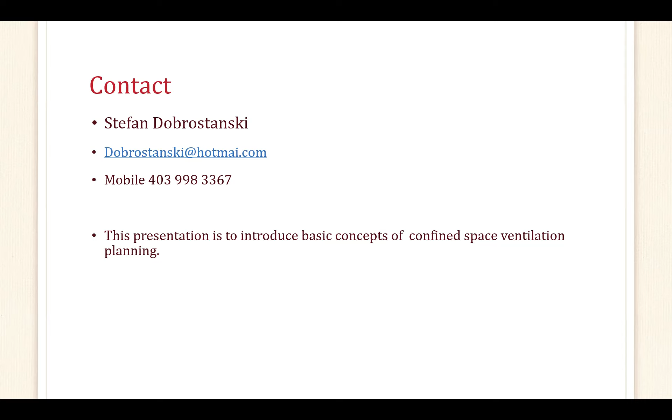I'm going to make a few basic assumptions during this presentation: that we all understand the definitions of confined space hazard ratings, confined space program elements, the roles of the parties involved in confined space planning and execution—the employer, the supervisor, instructor, and so on—isolation requirements, work permits and work records management, along with that hazard is a condition that may cause loss, risk is the probability that loss will occur, and that exposure control plan requirements are also understood.

These are fundamental to defining what type of ventilation planning needs to take place. If folks don't have these fundamental understandings, give me a call afterwards and I will be happy to go through each one of those. The terms are very specific and are outlined within regulatory requirements in both BC and Alberta, and within industrial hygiene practices as a rule.

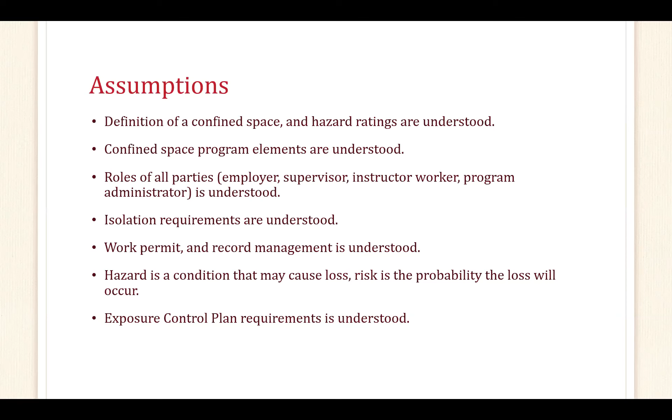So let's talk about some of the statistics and why this is so important. These are all mortalities. 15% of confined space training—15% of people who had mortalities had training. 31% of the events had written confined space procedures. None of them had a rescue plan. None of them used the written procedures. None of the events had spaces that were tested prior to entry. None of them were ventilated. And 60% of confined space fatalities are would-be rescuers.

So there's a couple of reasons why I pulled these stats out. Just in case anybody's interested, these stats came out of a study that was done out of Quebec that spanned 25 years.

At the end of the presentation, I've got a link to that if anybody wants to go read it. If you're a safety geek with a keen interest in this stuff, I strongly recommend that white paper, because it was instrumental in changing fundamentally how a lot of the regulators approach confined space education and requirements. It came out about 3 or 4 years ago.

So when we look at these, there's a couple of things that stand out right away. Understanding that ventilation planning is part of the written procedures. So if you don't have written procedures, you've got a big problem. If you have them and you don't use them, you have a larger problem.

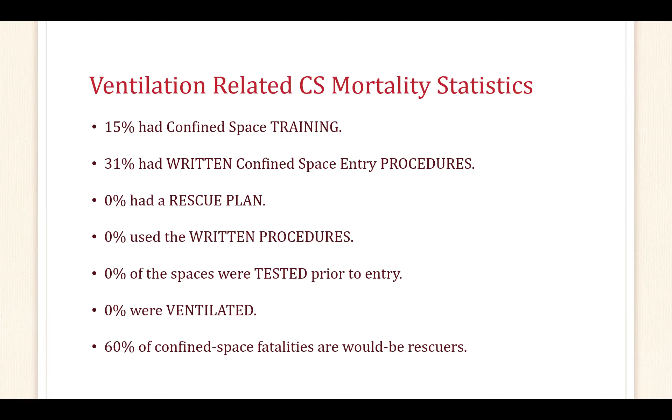So, hazards, hazard risks, and triggers. These are suggestions. These are my best recommendations. They are not the only way to do this.

Hazard examples - a list of fixed hazards should be in your confined space inventory. So your confined space inventory is not just a list of, I have vessel 1, 2, 3 in building A, vessel 2, 3, 4 in building B, and so forth, all listed as confined spaces or assessed as not confined spaces. It can also include all the fixed components.

This vessel has a weir inside it. It is a nitrogen entry. It needs scaffolding to reach the platform. WorkSafe BC has a very good template that I urge everybody to take a look at and either adopt or modify for their particular needs.

If you put your fixed hazards in your inventory, you never have to go back and visit them unless you do a physical change to the space. That's going to reduce the amount of effort it takes to do your assessments, and it's also going to centralize your primary information that you need for doing your ventilation planning. We'll come back to what that is in a little bit.

So then you've got your dynamic hazards. Those are going to be on your hazard assessment. Your dynamic hazards are things that change once your confined space is being prepared for entry, based on the work happening within that space. As an example, you've opened the space, washed it out, it's been proven to have a good atmosphere, and now you're going to go in and apply an isocyanate-based coating to the interior. You've now taken a safe space and made a very hazardous space based on the potential exposure to a cyanide-based gas.

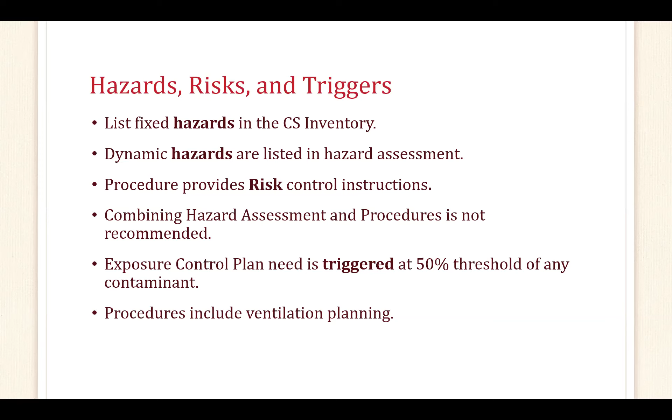So in your ventilation plan, when we get to that, it's quite simple what it needs. You have to have an evaluation of what to control. This is going to include your suspected contaminants, your measurement methods, your thermal differences — and that's one a lot of people forget, because even though something might be lighter or heavier than air, if you've got convection currents going on within that space caused by thermal considerations, you are going to have to take that into account when you're doing your ventilation planning and your measurement.

After you've got your evaluation, you have your flow rate — how much control to apply. We're talking specifically how much air we're moving through the space or into the space. And then finally is the method: how are we going to control that? Are we pushing air? Are we pulling air? Are we using natural ventilation or mechanical ventilation?

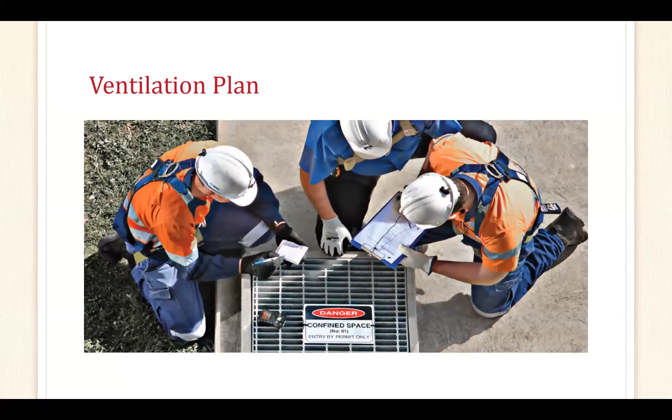Where are those mechanical air movers connected or located? This is fundamentally what a ventilation plan has, and that's really all it is that we need to be concerned with.

So under evaluation, space configurations are going to make all the difference. That's going to include everything from an excavation, and yes, a ditch or excavation can absolutely be a confined space. Look up the definitions in your regulatory area. Long story short, if you have an excavation that is more than, I think it's 4 feet deep in BC, and your slope on your walls is greater than 45 degrees, you start asking questions right away, because if you're going to introduce any form of a toxin, you are more than likely going to be in a position where that excavation is now being considered a confined space. There's a bunch of other criteria, but there's some mathematics we're going to talk about later about why the space configuration specifically for excavation is a bit tricky.

Obviously, the next big bucket is going to be: is it an enclosure? Do you have trays, or baffling, multiple flow restrictions? Do you have ventilation louvers that might be auto-actuated, or need to be positioned open or closed so you can direct your air movement? You have single or multiple flanges or ports to push or pull ventilation through. You have multiple connected sections. So out in multiple industries, we have a vessel or a space that's connected through piping or an adjoining structure, and then another space. We can't always get blinding into those, or we can't get isolation into those. So when we run into those space configurations that are a bit unusual, we have to do the calculations for that entire space and consider how we're going to do the ventilation depending on the work that's going on in the entire area.

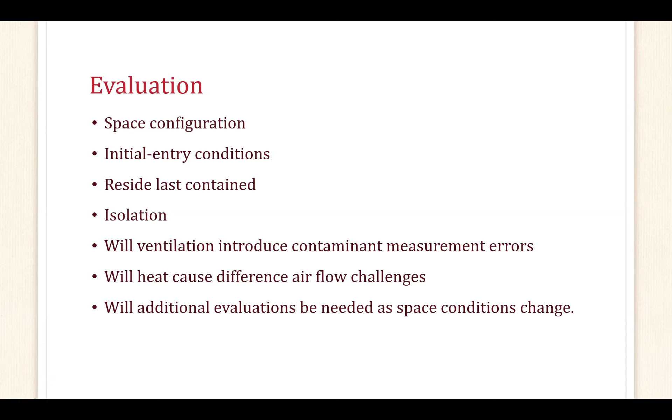But the moment we start introducing new hazards, whether that's a coating or off-gassing of materials, everything has to change. You have to be prepared for that in your procedures.

So in ventilation methods, there's fundamentally two basic considerations: natural ventilation and mechanical ventilation. Natural ventilation is the most desirable and the least used, primarily because people don't take the measurements and understand what needs to be accomplished. We need 50 CFM per worker inside a confined space where we're not introducing a hazard. We have a good atmosphere that exists, and we're not welding, specifically welding.

That's not a lot of air, and we can generally get that through natural ventilation in many spaces. It has to be measured. You can't take a guess. There's lots of good devices to do that.

Mechanical ventilation, number one sin I've seen in the oil and gas industry specifically is people put a gigantic air mover on thinking more air is better, and they blast the air into a space, and they only need, I'll pick a number, they need 2,600 CFM, and they're shoving 10,000 CFM through a space, and they're causing harm and discomfort to the person they're working with.

I've literally had my hard hat pulled off when I was entering an area to do an evaluation through a 36-inch pipe, and it literally sucked my hard hat off my head and pulled it down through 50 feet of pipe to the other end and pushed it up against the ventilation device. That's a little bit much, right? So measurement is everything.

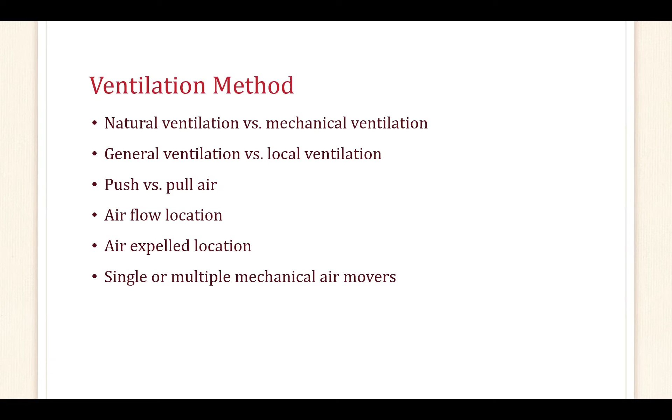Ventilation methods - this is the last part of this big topic. What are the volumes we're looking at? It's going to depend on the concentration of the contaminant present. Are we looking at pushing or pulling? We talked about that over and over. We talked about the requirement for 50 CFM, but when we start looking at something like a welder, you're going to need 2,500 CFM per welder, assuming the space is 10,000 cubic feet. There's all kinds of requirements to look at in great detail around fumes, smoke, and dust.

Part of the ventilation method we talked about was local ventilation. Here's a chart I pulled out of an AIH booklet that gives some very basic figures for welding. With local ventilation, a 4 to 6 inch inlet is only going to move 150 CFM through a 3-inch duct, and we can go from there. How much area do we have to move? If we're doing a 1/4-inch rod, which is massive, 600 CFM is probably going to be enough, but 150 will not - it won't overcome the requirements.

So just think about the ventilation - why are we doing the things we're doing? How are we going to get them done? Can it actually be accomplished, or are we just dreaming things up? Is there a better way? The number one way I figured out to do a lot of ventilation planning in my career is I sit down with the tradesman and ask them how it's been done in the past.

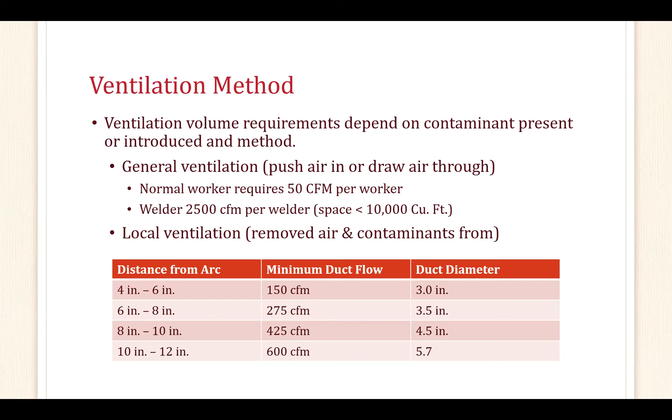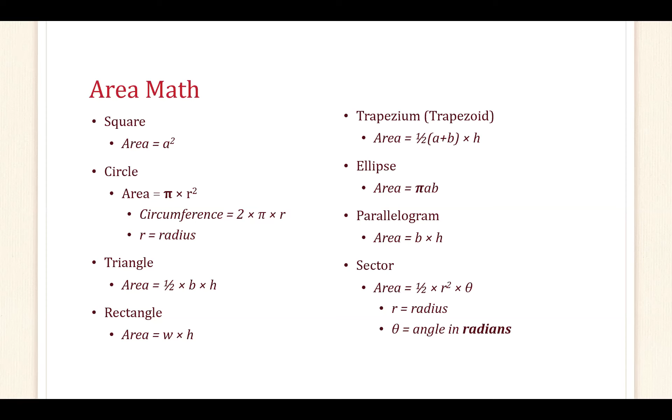And then I put the math to it. So a couple of really important things: there's no way to make math fun, I'm just going to throw it out there right now. We need to understand area math and we need to understand volume math. I'm not going to go into it in detail, but I've left these in the presentation so that people have them. I'll show you in a moment why they're important.

So as we start going through airflow, the last thing we need is to measure it. Putting your thumb in the air or holding the ribbon up is good to confirm that airflow exists, but it's not going to give you a scientific measurement of are we actually moving the right amount of air, too much, too little, the wrong direction, and so forth.

A couple of things when we're doing these measurements: make sure our scale is correct, and whether we're consistently using either standard or metric. Really, really important, because feet per minute is what we need to end up with. Cubic feet per minute is a standard explanation for velocity and volume. If you're reading in inches per second, or miles per hour, you're going to have to convert those back and forth. Really important to get this. So check your meters always, understand what's going on, and get that sorted out right away.

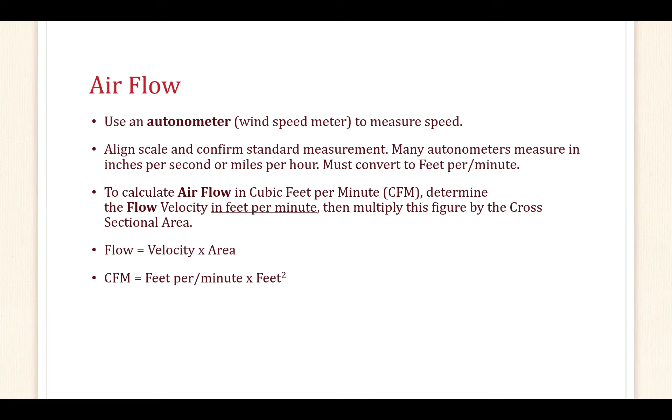For our flows, we need the velocity times the area of the space in order to calculate that out. So I just threw on here some conversion tables that are really simple, so that depending on how your device is reading, you can flip it back and forth to feet per minute. Again, that's the most important one there, that second column.

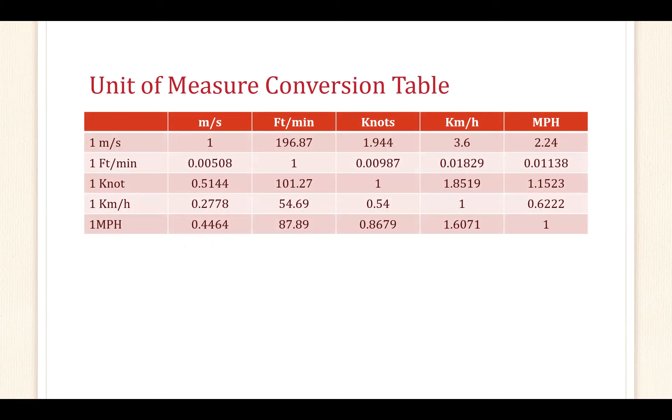So the other thing to talk about is you can't just stick your anemometer or your wind speed indicator across the port with the face of what you're measuring and say it's good. You really need to get the average of what that face looks like. Now that's going to depend tremendously on how big a space is. Are we talking a 72-inch sewer opening, or are we talking a 12-inch duct?

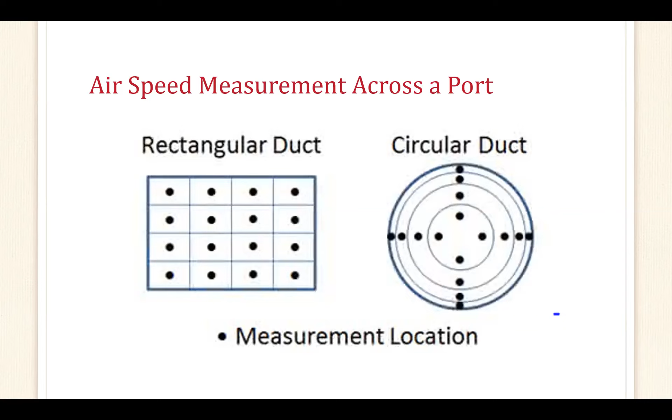Generally speaking, minimum for smaller stuff I use is, we're talking 6-inch to probably 12-inch. I use a minimum of 8 points, something about a third of the way down out from the center, and then a third of the way closer to the edge. But these are some examples of where you need to, when you're doing your measurements, make sure you mark down what was the value for each one. You're going to add them all together, divide by the number of measurements. That's going to give you an average airspeed. You're going to use that average airspeed to calculate flow based on the actual size of the device.

It's cylindrical, has a length of 14.3 feet by 60-inch diameter. Inlet and outlet pipes are 12 inches and the manway is 24 inches. These are important components for the mathematics we're going to show you in just a moment. If additional airflow is needed, it should be injected at the lower flange. So convection flow goes out the top. It's going to help, or at least not impede upon the flow.

Right? If we change this chemical to bromine gas, it's got a vapor density of 5.5 to air being 1. How's that going to impact the ventilation? Also consider that it's got an LC50 value of 116 parts per million, which is very, very toxic. And with it being 5.5 times heavier than air, the airflow will have to be reversed. You're going to shove air in the top and eject it out the bottom. You also need to make some different considerations with your ventilation planning.

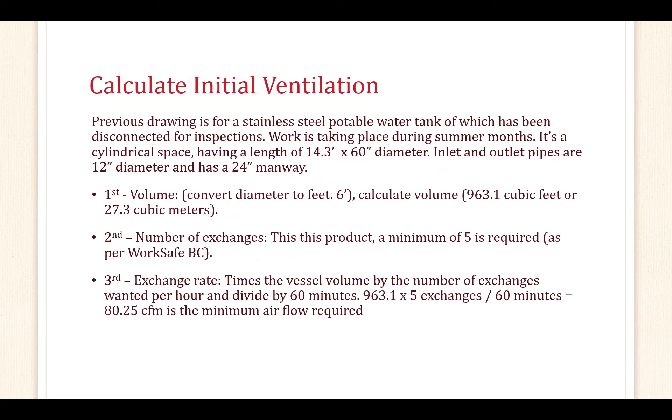When we put our air flow on there, do we actually have that or not? If we've got 100 CFM, we know we're going to be good in 1 hour. Now, because this is initial entry, we don't have to do it in 1 hour, but we have to do 5 changes. So if we don't have that, we have to work backwards and figure out how long this is actually going to take, 5 hours, 5 minutes, but we need to have the 5 air exchanges. Don't forget, when you're done, you've got to turn it off 20 minutes before you do your initial tests.

So once we've done our assumptions and our math on this, we're going to actually go out and measure the actual flow. To validate your flow, you have to understand your pipe flange diameter. In this particular case, our pipe flanges are 12 inches. So a 12-inch flange is 0.5 of a foot. Remember, you're not dividing by inches, it's percentages of a foot.

So you're going to do pi times the radius squared. For a 1 foot flange, 0.5 times 0.5 times 3.14, that gives you 0.25 times 3.14, and that gives you 0.785 squared area. That's important, because depending on the speed of the air going through that hole, you can work backwards and calculate the actual CFM going through that space.

Similar with the manway, you can do the same thing. It's a 24-inch manway, so your radius is 1 foot. You go 3.14 times 1 times 1, that gives you 3.14 feet squared.

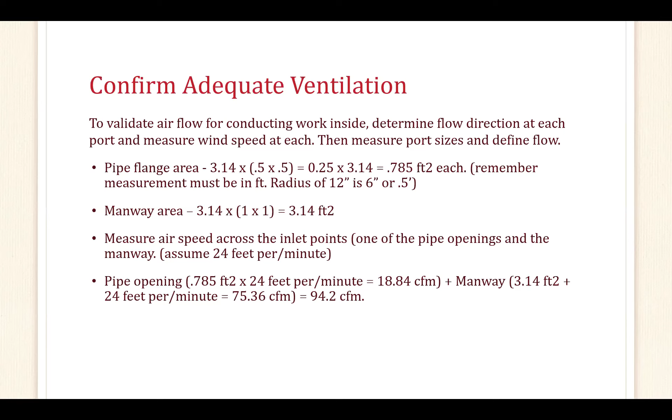So let's go back to the whole conversation with the bromine. How is this going to change it? Well, the only real change we're going to see is that the math is going to be identical, but the number of initial ventilations is going to change. We know that 5 air exchanges is going to give you approximately 95% of air exchange in a given space, a typical space. There are some fluid mechanic assumptions in there that things aren't really crazy or in weird shapes. That's typically what we're going to see.

At a toxicity of 116 ppm for the LC50 value, we don't want to only have 5 exchanges. 5% being left in there is going to plausibly do a lot of harm. So we're going to up that to 20 ventilations, and then measure it. We're going to make very sure. And 20 might not be enough, you might have to go up. But you need to understand what products you're dealing with and what space you're looking at to figure that out.

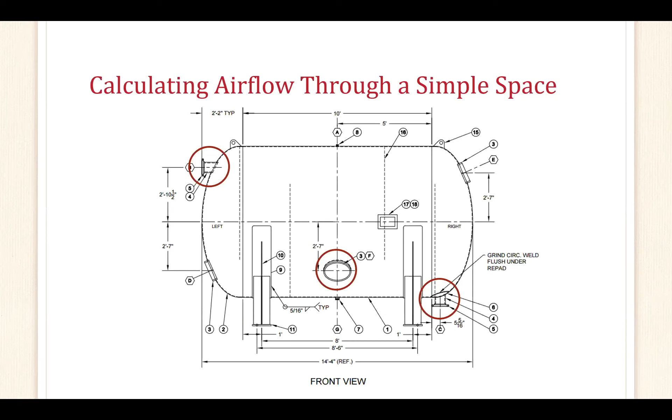So that's a simple space. The mathematics are always going to be the same regardless of anything else. That's one good thing about doing ventilation planning. The math is the math.

So when we're starting to look at multiple spaces, we have to start doing multiple measurements. If you've got a whole pile of egresses, you have to start looking at that. The one thing we have to look at right away is, is it drawing in the top or the bottom? Does that make a difference? Do we need that space isolated, or do we need it interconnected? You're going to have to crawl up and down in your plan, figure out every place you have to go measure, and then someone's got to crawl up there and take the actual measurements. We can't just check the outflow and make the assumption that that's good.

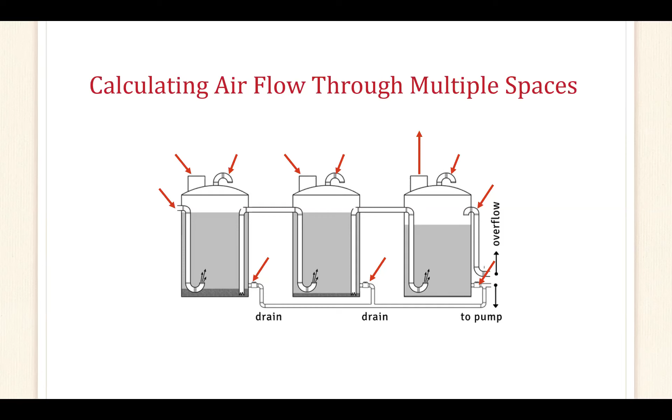And I'll show you why in just a minute. You want to pull on where are all the non-powered circulation points, right? So I talked a minute ago about trench.

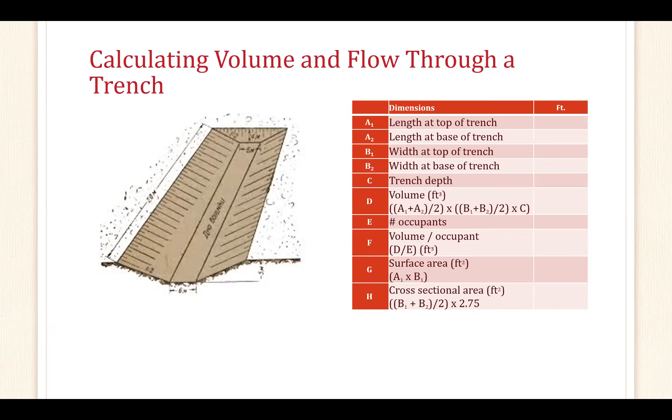Versus the other end of that, consider a stadium, which is a gigantic area with a similar shape to a trench—your depth to width ratio is typically 1-to-1. You should be just fine. Again, if you have any doubts, measure it. You've got the wind meter, the anemometer. Protect yourself first, go in and take the measurements. Always confirm.

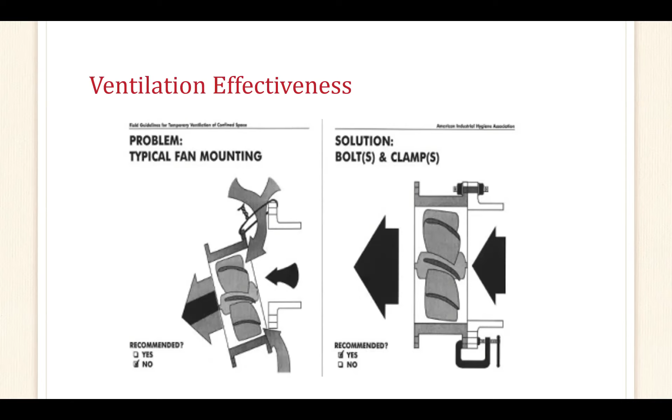Don't be lazy. Again, this all comes down to your planning and your ventilation planning documents. How are you going to secure them? You're going to bolt it up on the top of the right-hand picture, or put it on with a clamp at the bottom. There's 100 other ways to cut this onion. This is just one example of getting those fans or mechanical ventilations properly mounted.

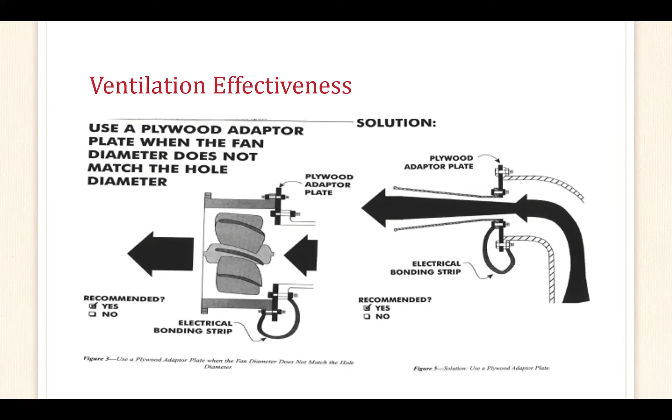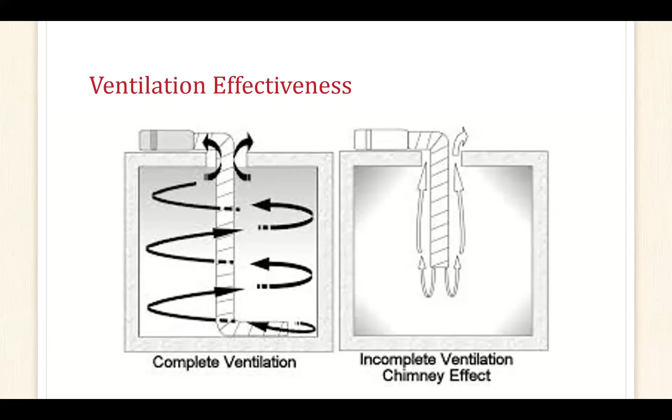Ventilation effectiveness - you're going to think about this really carefully. How are we going to effectively get the ventilation in? If we're doing the example on the left, we're going to get a nice circular pattern, away you go, full ventilation. The one on the right, you get head pressure or chimney effect, where it's just going to shoot down and straight back out, and your sidewalls are not going to get properly vented. That's very problematic.

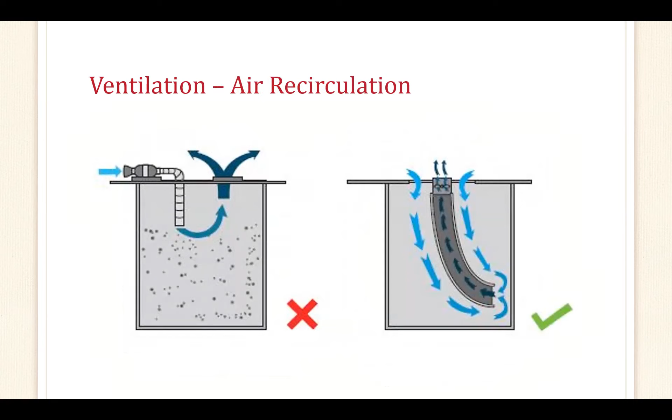Air recirculation - if you're going to short circuit it across the top, you can see the one on the left is problematic, the one on the right is better. Not always correct. Air flowing through multiple spaces, we talked about earlier, there's some examples as to ways it can be done. You don't want to go into where the air is contaminated, you want to go in the fresh air side, obviously.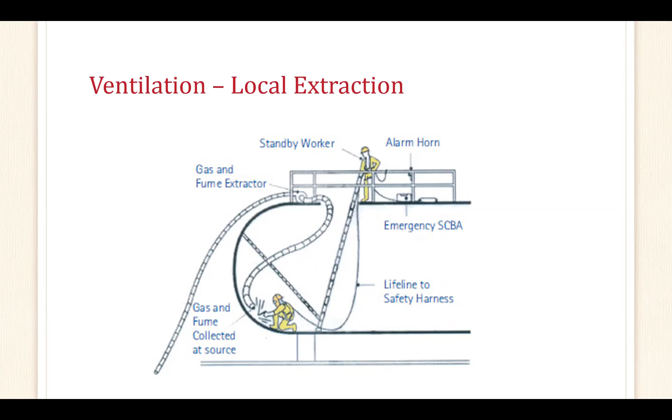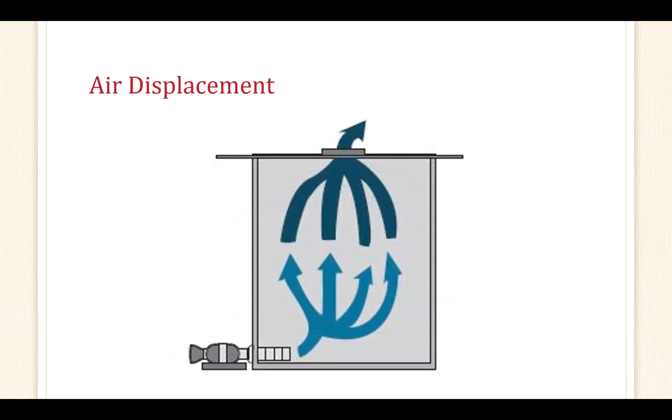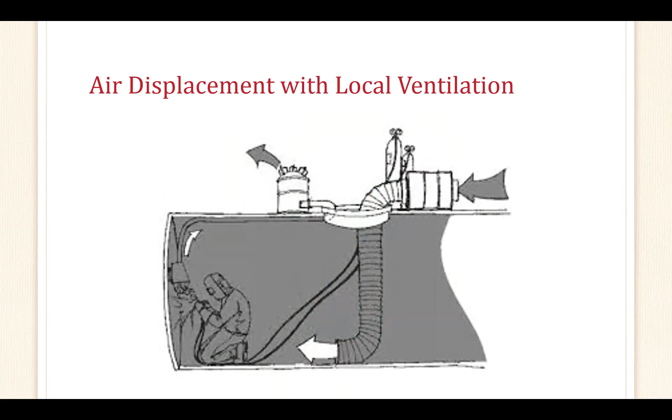So primary movement of air is just the basic displacement. That's all fine for a regular environment of just moving air through it. But if we're dealing with other methods, we talked earlier about air displacement two pictures ago. This is the way I would prefer to see an enclosed tank have local ventilation at the welder, and air being pushed in behind the individual or into the space to make sure that they're safe.

Quick diagram about heavier than air contaminants - you're going to pull from the bottom and push from the top, obviously, and reverse it for lighter than air. Long flow displacement we talked about, there's just an example of a daisy chain ventilation system. These can get very, very complex. Again, if you're not 100% certain, before you put anyone else in there, you protect yourself - you go in and actually take measurements and confirm that that's adequate.

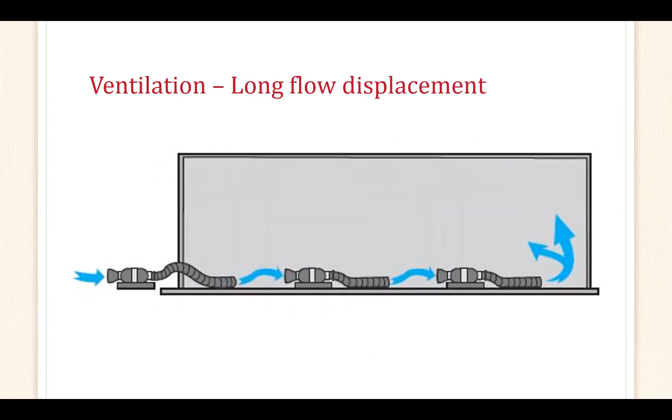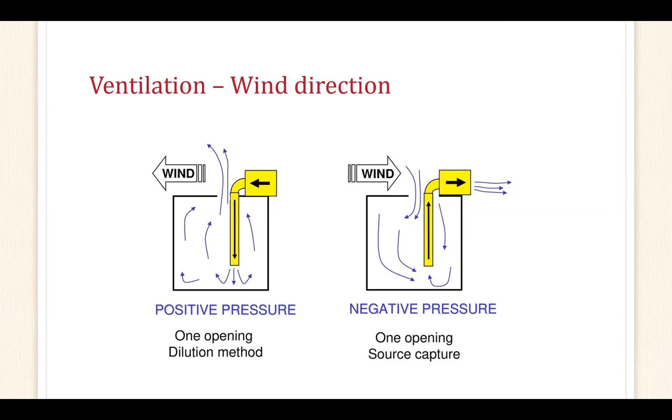One of the ones that I see less often is there are ways to use wind direction to use natural ventilation. Again, we always want to measure, but think about how you're positioning your systems, especially for natural ventilation. Are we trying to capture the wind and force it into an area, or are we trying to use the wind to draw out, using a Venturi effect, draw out the air? And again, it's going to really depend on the space and what are the contaminants.

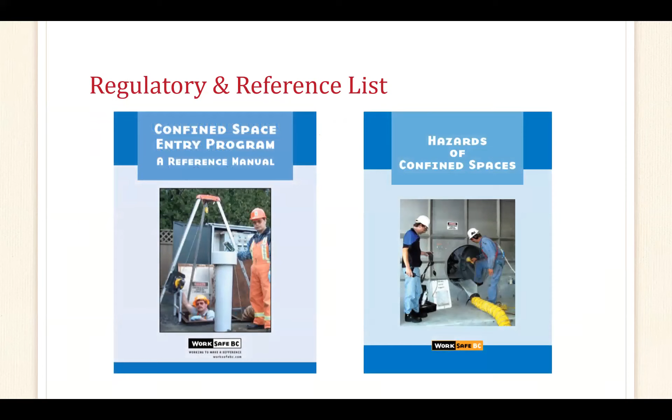So CCOHS has got two online courses, strongly recommend them for anyone doing this at work. WorkSafe BC has a number of reference manuals, and there's some examples of forms. And that's it, thank you.